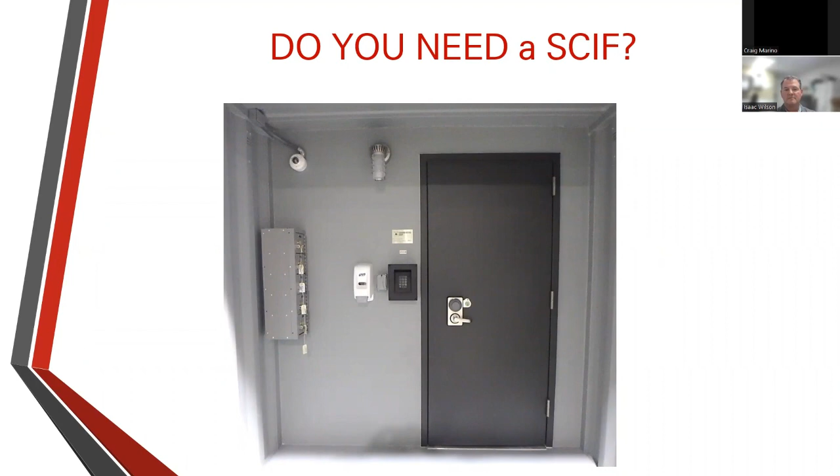We get phone calls every week from people expressing their interest in getting a SCIF. Most of the time they'll say, we absolutely need a SCIF and we need a SCIF now. And most of the time they really don't. The key is to take a look at your contract security requirements. The question you need to ask is, is there a requirement for processing top secret level or higher information, or possessing and discussing sensitive compartmented information at your facility? If you don't have either of those requirements, you don't need a SCIF.

And there are a variety of less expensive alternatives to meet non-SCIF secure space requirements. Generally, we advise against building SCIFs unless you've got a clear contractual requirement. The reason for that is SCIF projects typically involve pre-approval from an accrediting official. Without that, you're building on spec, and you take on the risk that you won't get accreditation. That could leave you with a very expensive conference room.

Now, that isn't to say that you can't build a SCIF in advance of a contractual need and get it accredited later. We've done that for some of our clients. But you need to go into that effort with a clear understanding that building a SCIF without a contractual need creates risk.

So there's two primary types of SCIFs. Assuming you do have a requirement for a SCIF, there are fixed facilities and T-SCIFs, or temporary SCIFs. The fixed facility is just that—it's a SCIF built to remain in place for the duration of its life. It must be built in accordance with the ICD 705 standards as a basic guide for construction. But the specific design and construction may vary so long as they follow best practices and end up with the required performance results.

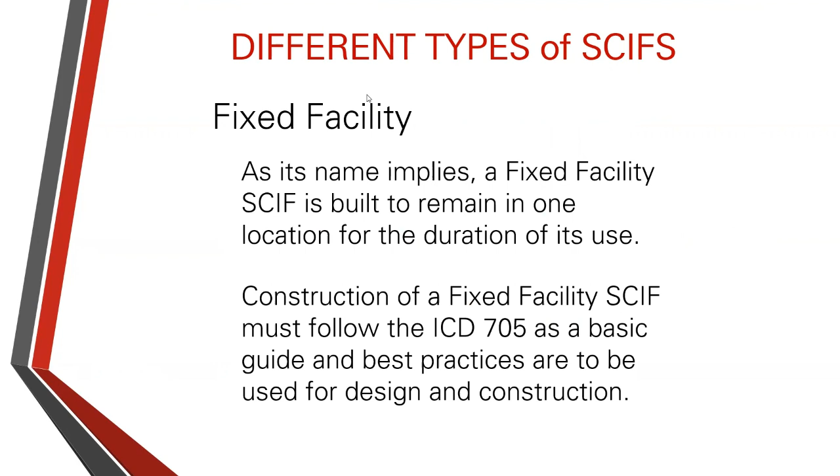A tactical or temporary T-SCIF is built with the expectation that it will be operational for a limited period of time, which is generally 1 year per T-SCIF accreditation. They can be mobile or a fixed structure, but they're most commonly used for OCONUS environments, where it's extremely costly or takes a very long time to build, or the infrastructure is not in place for a fixed facility.

T-SCIFs are often built to be relocated, repositioned, and depending on their design, use, and operating environment, can be accredited for use with some or all of the ICD 705 elements. So mission requirements, operational life cycle, and the operational settings will all affect how much or how little of the 705s must be followed.

Ultimately, the accrediting official, or AO, will determine that at the outset of the project. For example, a plywood building with nothing more than a deadbolt on the door can be accredited as a SCIF in a forward operating location if the AO determines that meets sufficient security for the threats of that environment. It's the AO who will balance the operational need with the ability to rapidly comply with standards for accreditation.

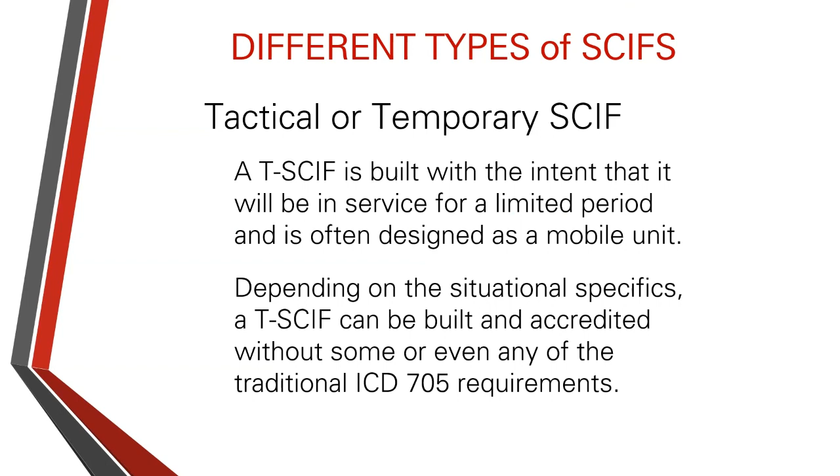The nature and duration of your program, the location of operation, as well as the potential for future SCIF needs beyond the immediate requirement, will influence whether a fixed facility or a T-SCIF is preferred. Those factors, along with your construction budget, will also guide your decisions regarding the SCIF construction option you select. There are three basic types of SCIFs.

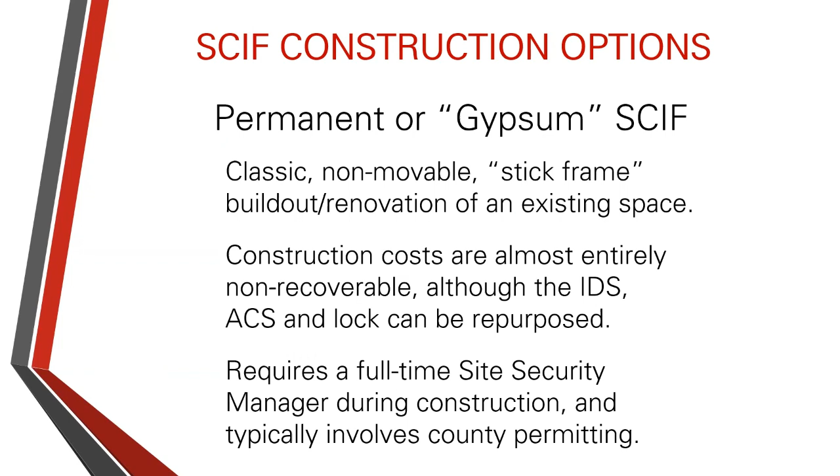There's gypsum SCIFs, mobile SCIFs, and modular SCIFs. We'll start with gypsum SCIFs. They're conventionally stick-framed in place. Traditional construction involves layers of sheetrock or drywall, TBM foil, and other building materials that are built into place, making it permanent. It can involve construction with an unfinished or shell build office environment, or a renovation of an existing office space. Construction generally must wait for receipt of county building permits, and the construction site must have a full-time SSM, or site security manager, to control access and maintain oversight of all construction materials.

The mobile SCIF is generally based on an ISO shipping container, which is enhanced to provide a turnkey plug-and-play SCIF that can go anywhere throughout the world, depending on the design. Because permitting isn't typically required, construction is performed off-site, and build time and delivery tend to be much faster. The design configurations are basically unlimited. They can be relocated as needed, although this will involve reaccreditation each time it's moved. Mobile SCIFs can be situated outside or within a warehouse or other enclosed environment of sufficient size to house them.

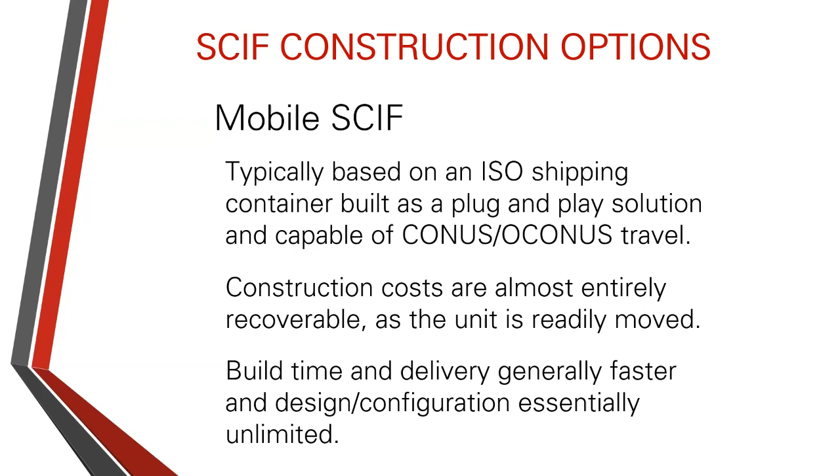Modular SCIFs are comprised of prefabricated panels, which are manufactured off-site and then assembled within an existing structure, essentially creating a room within a room. This limits the amount of on-site activity and enables faster and more discreet installation, as manufacturing can occur in parallel while building permits are being secured. Modular SCIFs can be expanded or reconfigured, and they're readily relocated by disassembling and then reassembling the panels at the new location. This adds to their utility as well as their usable life.

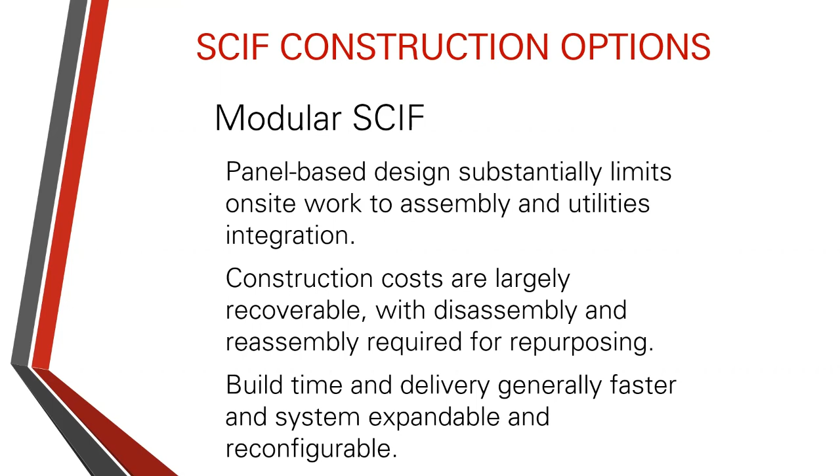We actually had a client recently that no longer needed their modular SCIF. They sold it to another company who asked us to come out, take it down, transport it to their offices, and then reassemble it for reaccreditation.

There are some location factors, primarily CONUS and OCONUS. When you're building a SCIF in the U.S., the following requirements are at work: construction personnel must be U.S. citizens only, but they may not require a PCL. SCIFs may only be built by U.S.-owned companies, using a U.S.-owned general contractor and U.S.-owned subcontractors. A site security manager, or SSM, must be on the construction site for the duration of the project, from start to finish, to control the records and access to the work site, and inspect materials as they're delivered and the security of those materials.

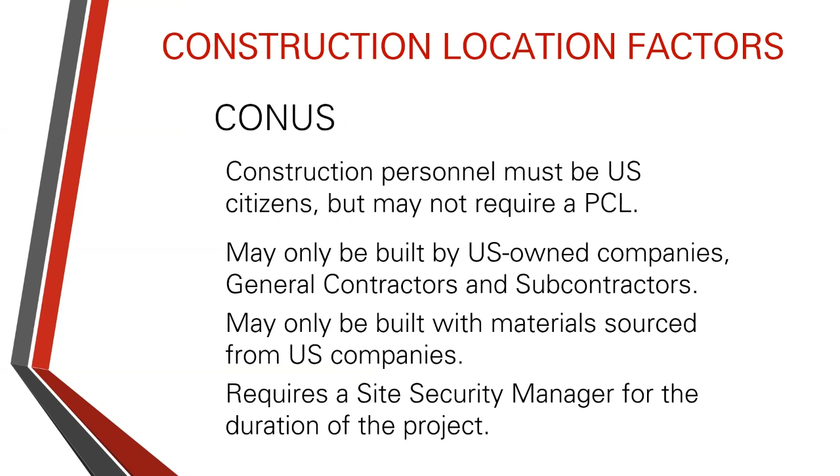When you're building OCONUS, the SCIF overseas requires, in part, a function of the specifics involved. Cleared escorts are required to build overseas, and the construction personnel must have a PCL. Conversely, those are not absolute requirements in CONUS.

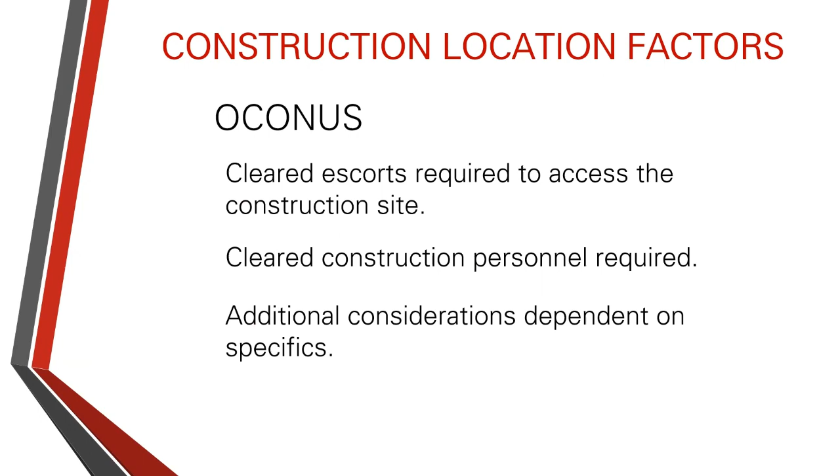Regardless of which type of SCIF you're building or where it's physically located, a chief consideration and an absolute requirement is multiple layers of security, or security in depth. This can take the form of elaborate access control systems, intrusion detection systems, and camera networks. It can also involve less sophisticated elements, including barbed wire perimeters, fencing, and security guards. SCIFs are not meant to be impenetrable, but they are meant to provide sufficient protection and time for notification to a response team in the event of a security breach.

As a result, your ability to establish security in depth will be a chief factor as you consider location. Where are you going to place this SCIF? Generally speaking, SCIFs built or installed in office settings, and we'll focus on that scenario for the purpose of this discussion in this audience, have several basic elements that you want to incorporate.

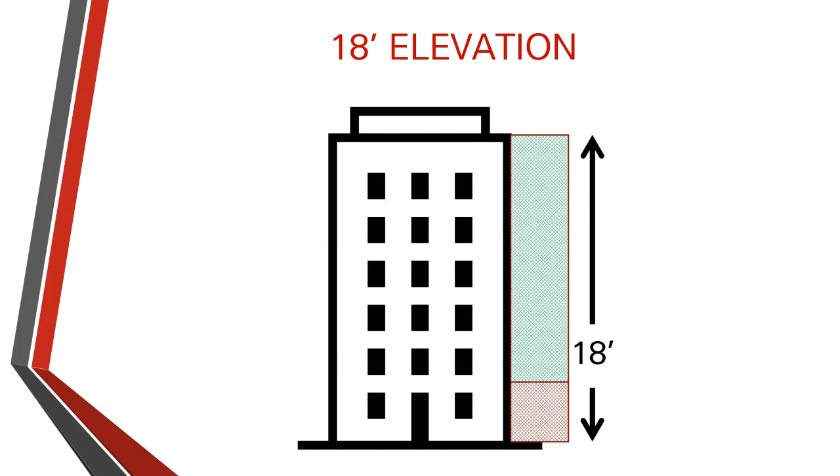While it's possible to establish a SCIF on the first floor of the building, the strong preference is for SCIFs to be positioned at least 18 feet above ground. Similarly, SCIFs can be built along window lines, but doing so introduces another element that will have to be mitigated.

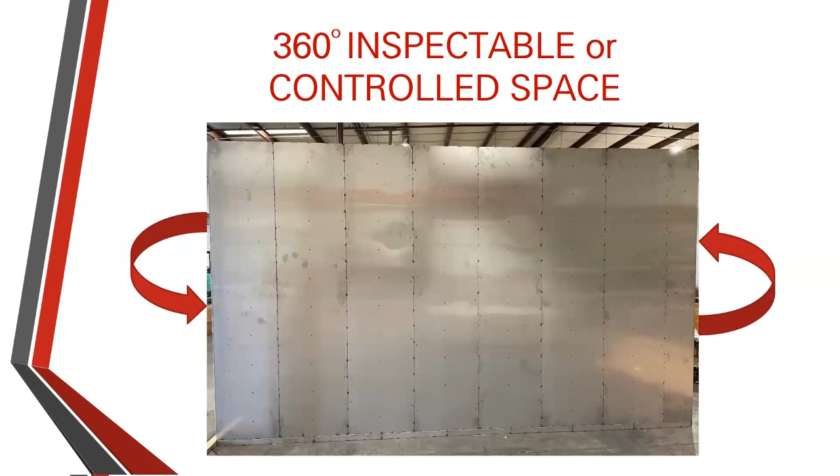The location of your SCIF needs to allow for inspectable and controlled space on all sides, including below the floor. We recently received an inquiry to elevate a SCIF onto lucite clear Lexan blocks so they could allow for regular review underneath. There are stories of OCONUS folks drilling through the SCIF floor from the office below, so if you don't have that inspectable space, you need to be able to view in between your SCIF and the actual structure floor.

You'll also want to be knowledgeable of all your neighbors in the office. Do you share a wall or a common corridor with an unknown party? Who's above and below you? Are there other buildings nearby with line of sight into your office via the window line? Are there other SCIFs within the building or the buildings immediately surrounding yours? Those will all factor into security in depth.

Also, do you have staff or a security service provider close enough to meet the required response times in the event of a security event? If appropriate, what is your proximity to armed response capabilities? What is the security for the building and for the office suite as well? You have to remember that security in depth plays into the overall perimeter as well as the actual SCIF.

Additional technical considerations specific to the building and office are the mechanical, electrical, and plumbing already in place that may need to be altered or repositioned to accommodate the SCIF. That can be quite costly to move systems out of the way of the SCIF that don't support it. The distance from the proposed SCIF location to those electrical, mechanical, and communication rooms that it will have to tie into - the further away, the more it costs.

Whether or not there's capacity available within the main electrical panel, because you have to have a dedicated electrical feed to that SCIF. And then we move on to different considerations for SCIF use, and I'll let Craig take that one.

The work being performed in the SCIF is also going to impact its design and construction. Are you going to be housing workstations, or is it just going to be a conference room? Are you going to have secure video teleconferences, or will it operate as a data center?